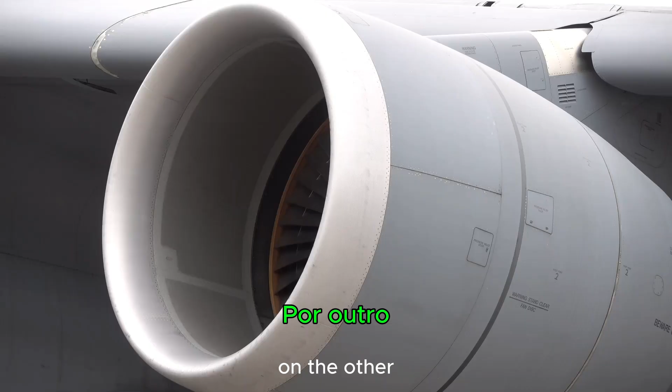On one side, we have the sharp economic ideas of Daniel Fraga, a thinker known for his strong opinions on careful spending, fighting inflation, and the power of decentralization. On the other, we have the incredible fire-breathing heart of modern aviation, the jet engine. You might be thinking, what could a financial guru and a jet engine possibly have in common? It's a great question, and the answer is more fascinating than you might think.

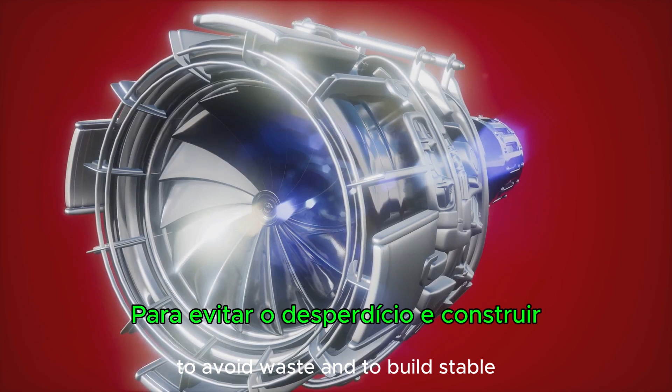At first glance, economics seems to be all about money, markets, and human behavior. Jet engine engineering, meanwhile, is about physics, materials science, and controlling incredibly powerful forces. One is about spreadsheets and policy, the other is about thrust and thermodynamics. But if we dig a little deeper, we find they are both fundamentally about the same thing: efficiency. They are both quests to get the most output from the least input, to avoid waste, and to build stable, resilient systems that don't catastrophically fail.

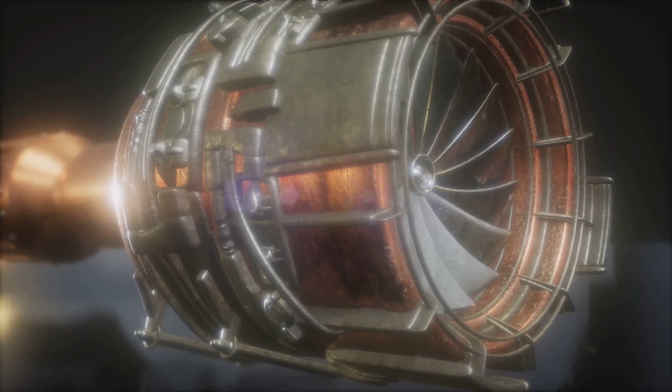It turns out that the principles Fraga championed for a healthy economy are almost a perfect blueprint for building a better, safer, and more efficient jet engine. Throughout this exploration, we'll use some simple economic terms that Fraga often discussed, like spending, waste, balance, and stability, and see how they map directly onto core engineering concepts. We'll see how an engineer's battle against aerodynamic drag is just like a government's fight against wasteful spending. We'll discover how the dangerous runaway heat inside an engine mirrors the destructive power of economic inflation.

By drawing these fun and clear parallels, we can gain a new appreciation for both the complexities of our economies and the genius of the machines that carry us across the sky. It's a journey into how sound principles, whether for money or for machines, lead to success. So, buckle up. We're about to take off on a unique intellectual flight where finance explains physics.

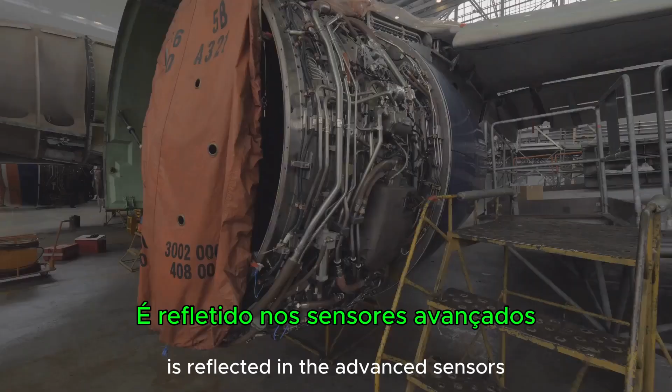We'll see how Fraga's advocacy for transparency is reflected in the advanced sensors that monitor an engine's health in real time. We'll even connect his ideas on decentralized systems like Bitcoin to a revolutionary new concept in aircraft design called distributed propulsion. By the end, you'll not only understand the basics of jet engine efficiency a little better, but you'll also see that the logic of building a strong, sustainable system is a universal language spoken by economists and engineers alike. Let's get this show on the road, or rather, in the air.

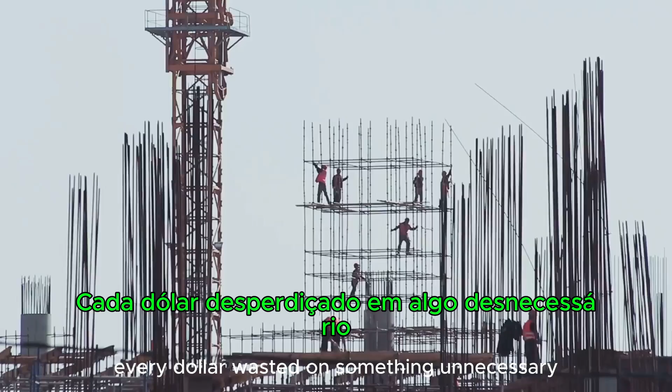In the world of economics, Daniel Fraga was a passionate advocate for fiscal prudence. This is a fancy way of saying he believed governments and individuals should be extremely careful with their money, avoiding wasteful spending at all costs. Every dollar wasted on something unnecessary is a dollar that can't be used for something productive, like building infrastructure or investing in education. This waste acts as a constant, silent drain on an economy's potential.

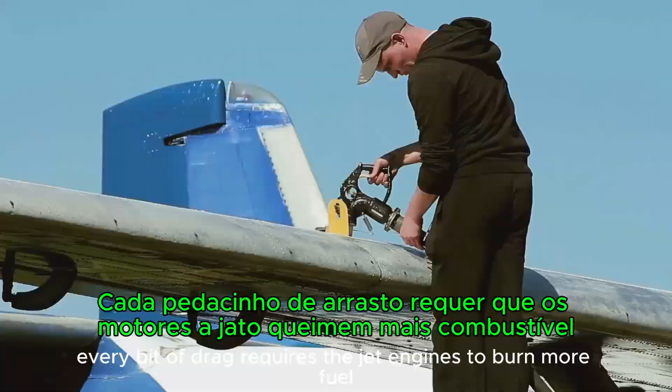In the world of aerospace engineering, there is a perfect parallel to this concept: aerodynamic drag. Drag is the force of air resistance that pushes back against an airplane, and it is the engineer's number one enemy. It is, in essence, pure, unadulterated waste. Every bit of drag requires the jet engines to burn more fuel just to maintain the same speed, which is the aeronautical equivalent of wasteful government spending. Engineers work tirelessly to minimize it.

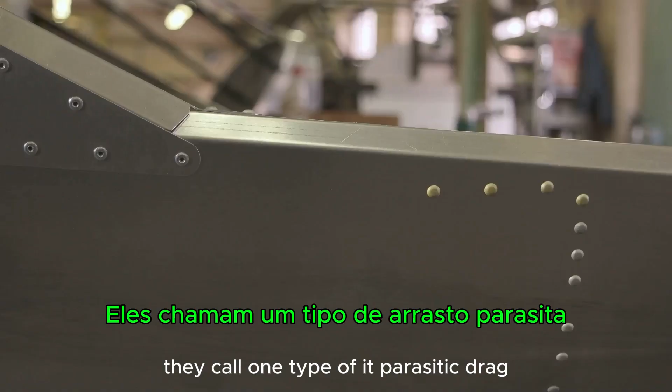They call one type of it parasitic drag, which comes from things like antennas, rivets, or any surface that isn't perfectly smooth. Think of these as the unnecessary expenditures in a national budget, costs that add up to a massive drain on resources. Just as Fraga would argue for trimming these fiscal parasites, engineers spend countless hours in wind tunnels smoothing out every surface of an aircraft to achieve a clean, efficient shape. The goal is to make the plane as slippery as possible, allowing it to glide through the air with minimal effort.

Achieving this smooth, undisturbed airflow known as laminar flow is the holy grail of aerodynamics. When air flows smoothly over a wing, it creates lift efficiently with very little drag. This is the aeronautical version of a perfectly balanced budget, where every resource, in this case the air itself, is used to its maximum potential without creating wasteful turbulence. It's like an economy where money flows smoothly, investments are smart, and there's no inflation eating away at people's savings. Fraga might have called this economic deflation in a positive sense, getting more value for your money. For an engineer, achieving laminar flow means getting more flight for your fuel.

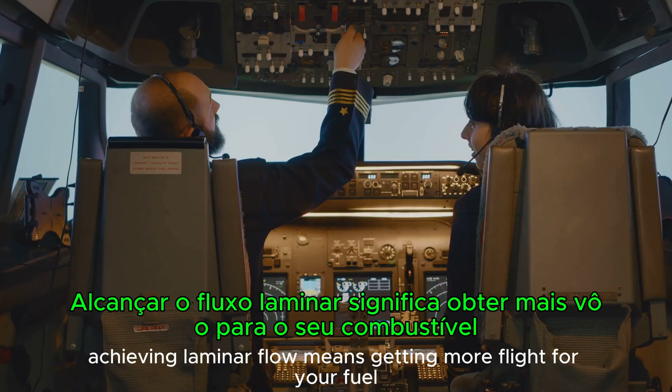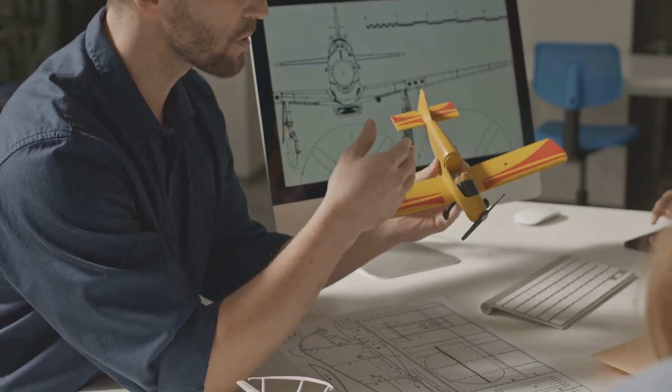Ultimately, the connection is crystal clear. Fraga's lesson on saving resources is a direct echo of the engineer's relentless battle against drag. Whether you're managing a nation's finances or designing a multi-million-dollar aircraft, the core principle is identical. Waste is the enemy of progress.

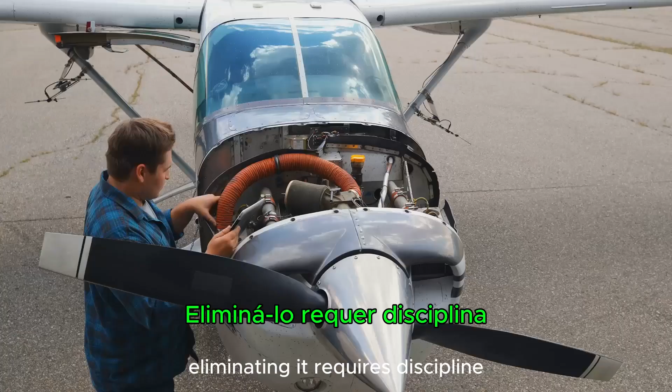Eliminating it requires discipline, attention to detail, and a deep understanding that small inefficiencies, when multiplied, can lead to massive losses. By designing aircraft that slice through the air with minimal resistance, engineers are putting Fraga's economic philosophy into practice, ensuring that the precious energy stored in every drop of jet fuel is spent on moving forward, not on fighting unnecessary battles against the wind.

If drag is like wasteful spending, then the heat inside a jet engine is like economic inflation. Daniel Fraga famously warned about the dangers of uncontrolled inflation, where a central bank prints too much money. At first, it might seem like a good thing. More money flowing around can create a temporary economic boom. But soon the value of each dollar plummets, prices spiral out of control, and the entire system becomes unstable and inefficient, potentially leading to a total collapse.

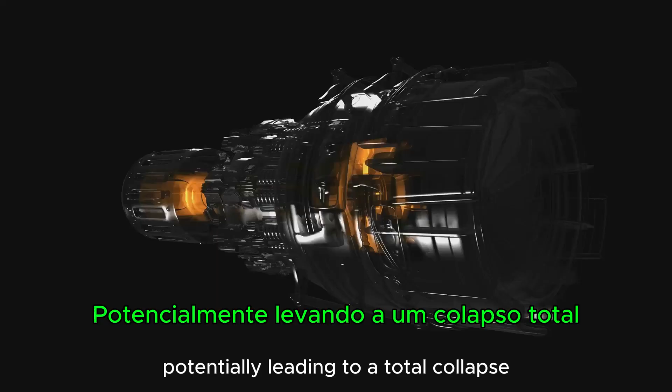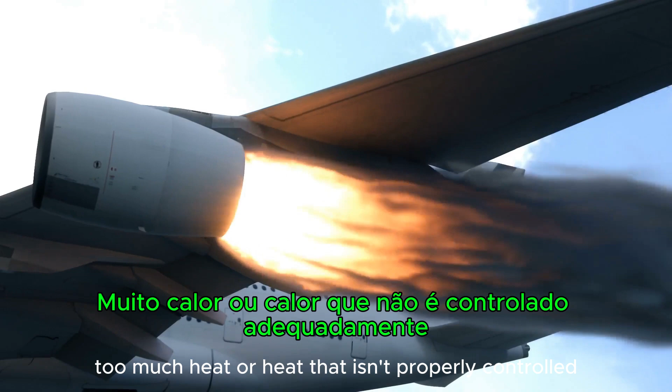In a jet engine, the single most important factor for power is heat. The hotter the gas exiting the engine, the more thrust it produces. But just like inflation, too much heat or heat that isn't properly controlled can lead to catastrophic failure. Engineers are constantly trying to increase the thermal efficiency of an engine, which is a measure of how well it converts the heat from burning fuel into useful work.

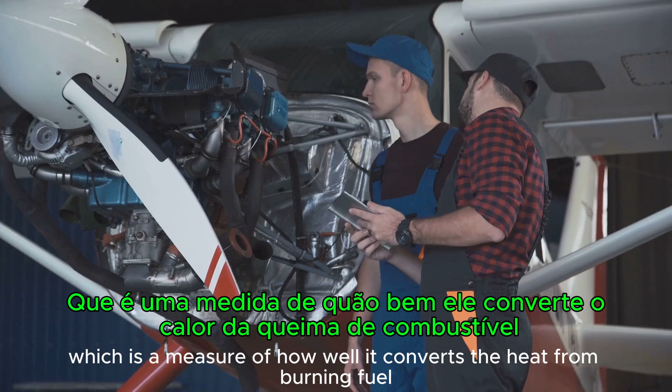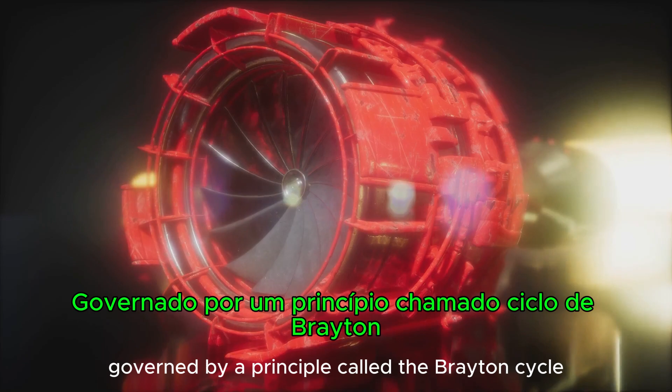One way to do this is by increasing the pressure ratio inside the engine, governed by a principle called the Brayton cycle. By squeezing the air more tightly before adding fuel, the engine can burn that fuel at a much higher temperature and pressure, extracting more energy. This is similar to a central bank carefully managing economic growth. A little bit of controlled growth is good.

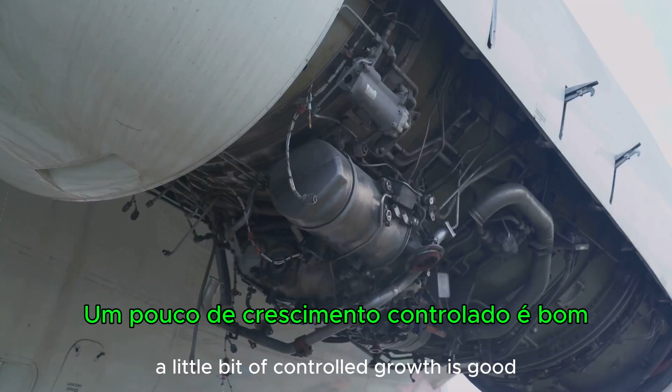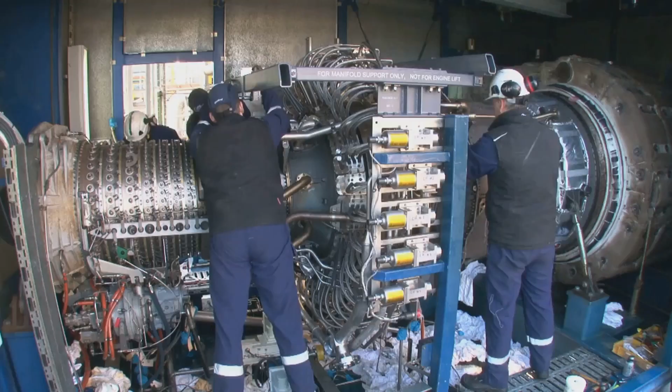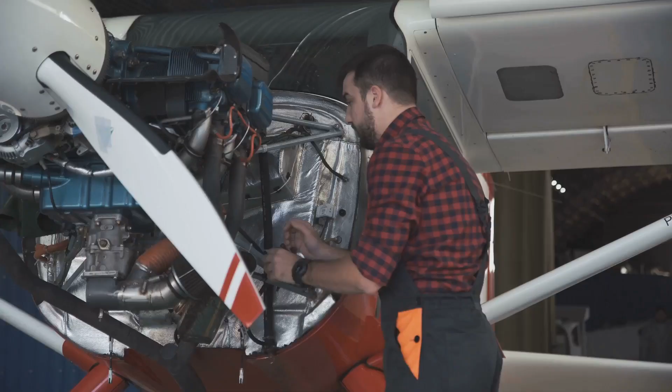However, if engineers push the pressure and temperature too high without reinforcing the engine's components, they risk disaster. The metal parts could melt or fracture under the stress, just as hyperinflation can fracture an economy. This delicate balancing act is the core challenge of modern jet engine design. Engineers want the benefits of high temperatures, more power, and efficiency, without the destructive consequences. They are in a constant battle against engineflation.

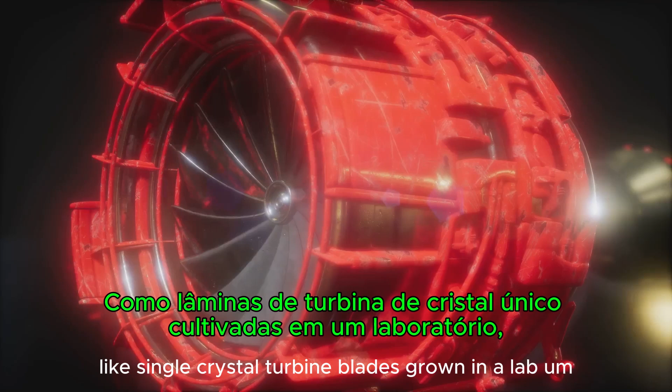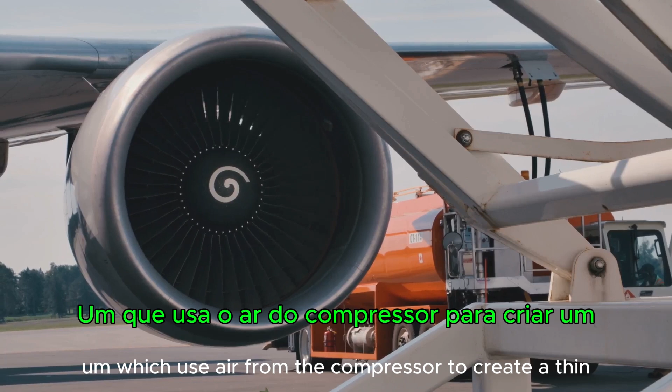To manage this, they use incredibly advanced materials like single crystal turbine blades grown in a lab that can withstand temperatures hotter than the melting point of the metal they're made from. They also design complex internal cooling systems which use air from the compressor to create a thin protective layer of cooler air over the hottest parts of the engine. This is like a government implementing smart policies to protect citizens from the worst effects of inflation.

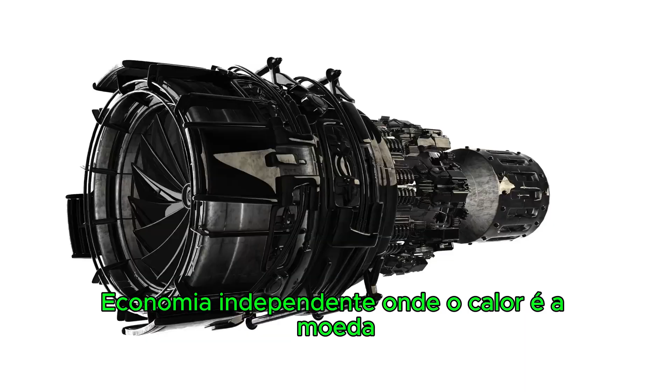So when you see a jet engine, think of it as a tiny, self-contained economy where heat is the currency. Fraga's warnings about the perils of printing too much money resonate perfectly with the engineer's challenge of managing thermal energy. Both systems require a masterful balance. Push too hard and you get a powerful but short-lived boom followed by a spectacular failure.

Manage it wisely with strong materials and cooling safeguards, the equivalent of sound fiscal policy, and you create a system that is not only powerful and efficient, but also stable and reliable for the long haul. Taming the heat is taming inflation, a principle that holds true both on Wall Street and at 30,000 feet.

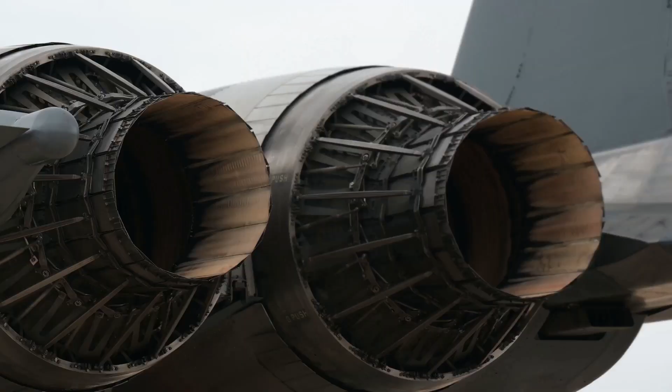Let's dive deeper into the heart of the engine, the combustion chamber. If the engine as a whole is an economy, then the combustion chamber is its central marketplace, a place of high stakes, high-speed transactions where the fundamental laws of supply and demand play out in milliseconds. In any economy, you have suppliers who provide goods and services and consumers who create demand for them. A healthy economy keeps these two forces in a delicate balance.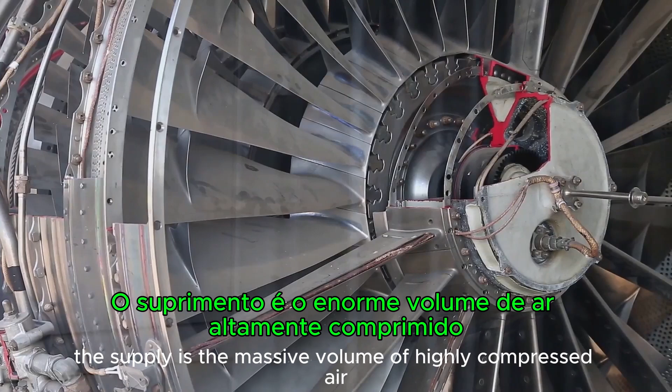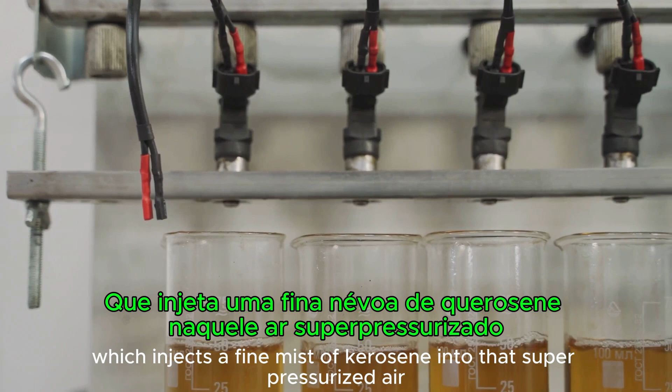In the combustion chamber, the supply is the massive volume of highly compressed air delivered by the engine's compressor section. The demand is created by the fuel system, which injects a fine mist of kerosene into that super-pressurized air. The goal is to achieve the perfect air-to-fuel ratio. If you inject too much fuel for the amount of air available, so excess demand, you get an inefficient, smoky fire. This is like an overheated economic boom fueled by cheap credit, where too much money chases too few goods, leading to waste and instability.

In an engine, this condition can cause the flame to become unstable or even extinguish itself entirely, a dangerous event known as a flameout. On the other hand, if you inject too little fuel for the air, insufficient demand, the fire will be weak and may not produce enough energy to keep the engine running. Kinda similar to an economic recession where a lack of spending brings commerce to a halt.

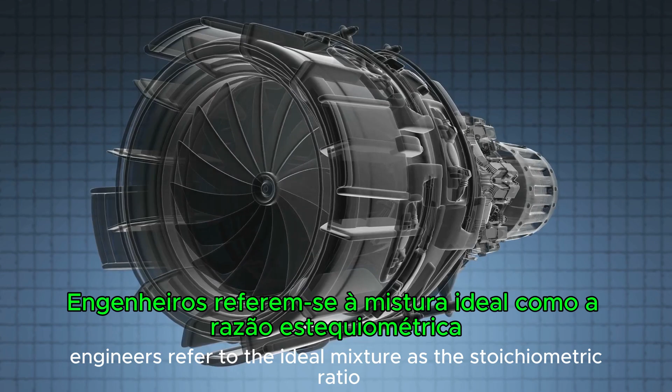Engineers refer to the ideal mixture as the stoichiometric ratio, but we can think of it in Fraga's terms as the gold standard of internal combustion. It's that perfect stable point where every molecule of fuel is matched with the right number of oxygen molecules to achieve a complete, clean, and powerful burn.

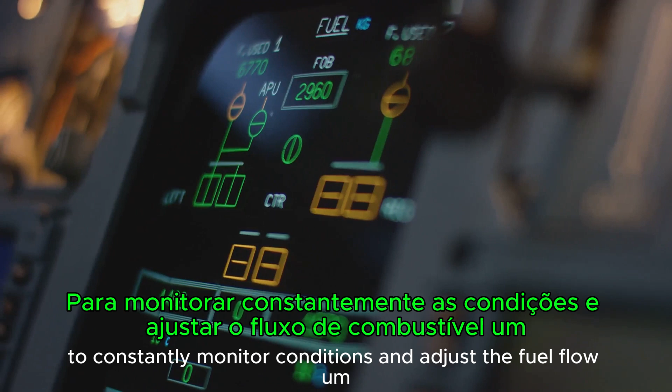Modern engines use sophisticated computer systems called FADECs, Full Authority Digital Engine Control, to constantly monitor conditions and adjust the fuel flow with incredible precision. These systems act like a hyper-aware central bank, making thousands of micro adjustments per second to maintain that perfect balance, ensuring the engine performs efficiently, whether it's idling on the tarmac or at full throttle climbing through a storm.

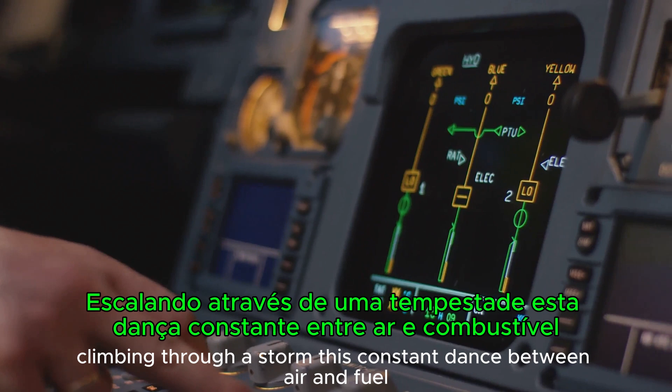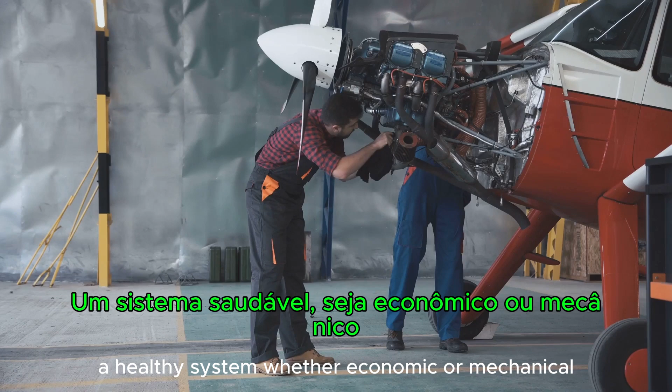This constant dance between air and fuel highlights a core economic principle that Fraga would appreciate. Balance is not static, it is dynamic. A healthy system, whether economic or mechanical, must be able to adapt to changing conditions while maintaining its core equilibrium.

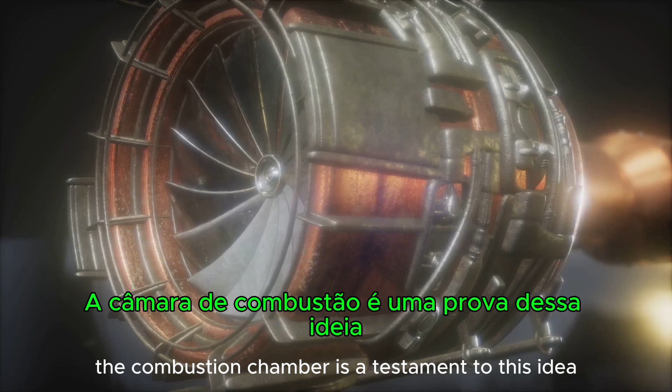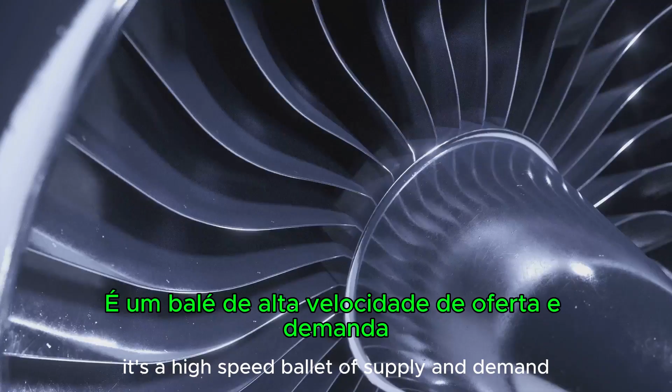The combustion chamber is a testament to this idea. It's not just a simple fire pit. It's a meticulously engineered environment designed to manage a continuous controlled explosion. It's a high-speed ballet of supply and demand, where achieving the perfect balance isn't just a goal for efficiency. It's absolutely critical for survival.

One of Daniel Fraga's most forward-thinking ideas was his strong advocacy for decentralization. He was an early proponent of cryptocurrencies like Bitcoin, seeing them as a way to create a more resilient and transparent financial system that wasn't dependent on a single point of failure, like a central bank or government.

In a decentralized system, power and control are spread out across a network. If one part of the network fails, the rest can continue to operate. This creates a system that is inherently more robust, adaptable, and resistant to shocks. It's a powerful idea, and amazingly, it's now taking flight in the world of aviation through a concept called distributed propulsion.

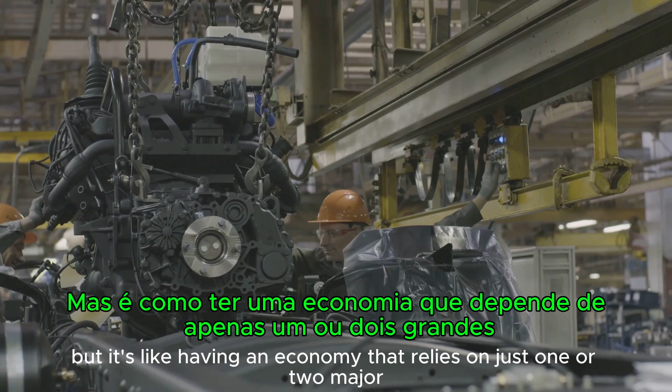Now, traditionally, aircraft have relied on a small number of very large, centralized jet engines, usually 2 or 4, slung under the wings. This is a simple and effective design, but it's like having an economy that relies on just 1 or 2 major industries. If one of those massive engines fails, it creates a significant problem that requires the entire aircraft system to compensate.

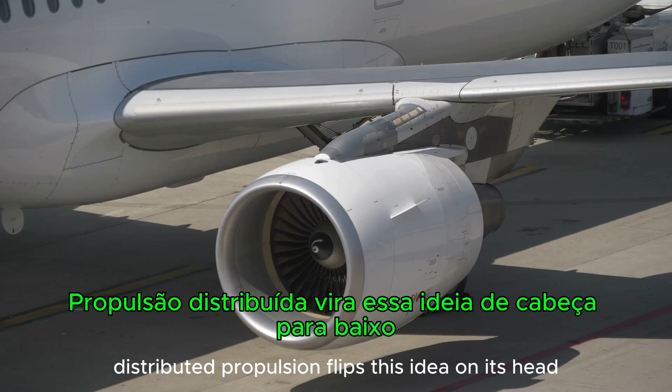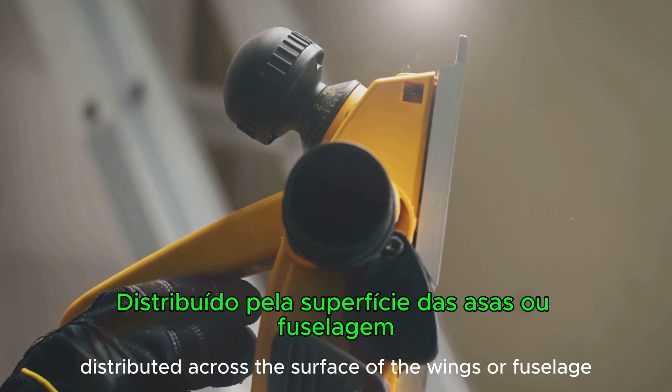Distributed propulsion flips this idea on its head. Instead of a few large engines, the aircraft uses many smaller, lighter, and often electric motors distributed across the surface of the wings or fuselage. This is the aeronautical equivalent of Fraga's decentralized economy.

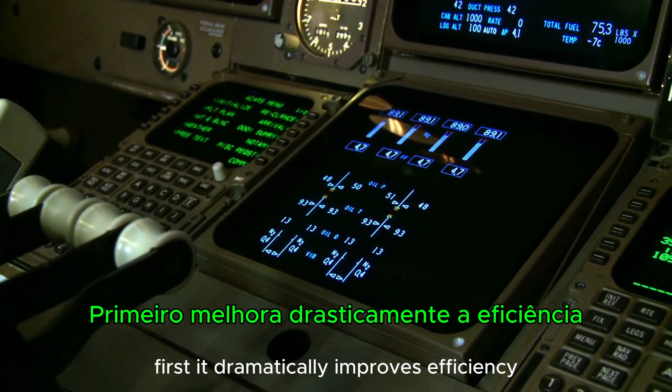The benefits of this decentralized approach are enormous. First, it dramatically improves efficiency. By blowing air uniformly over the wing's surfaces, these smaller motors can increase lift and reduce drag, allowing the aircraft to fly using significantly less energy.

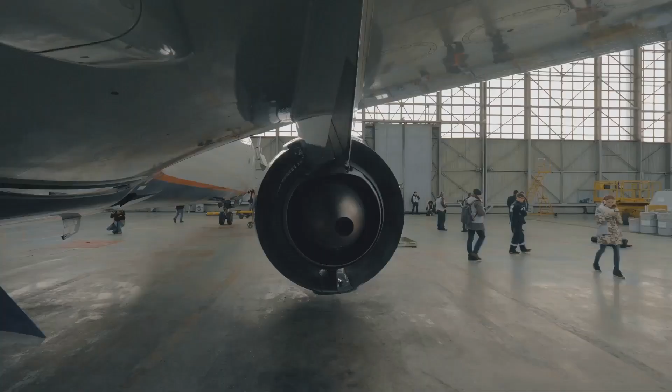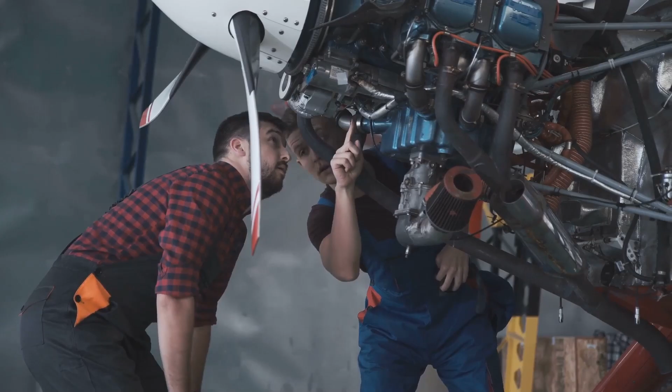Second, it enhances safety and resilience. If one or even several of the small motors fail, the impact on the aircraft's overall performance is minimal. The remaining motors in the network can easily pick up the slack, making the system far more fault tolerant than a conventional design. This is precisely the argument Fraga made for decentralized finance.

A network of many small participants is stronger and more stable than a system dominated by a few large, too big to fail institutions. This parallel shows how a fundamental principle that decentralization builds resilience can be applied to solve problems in vastly different domains.

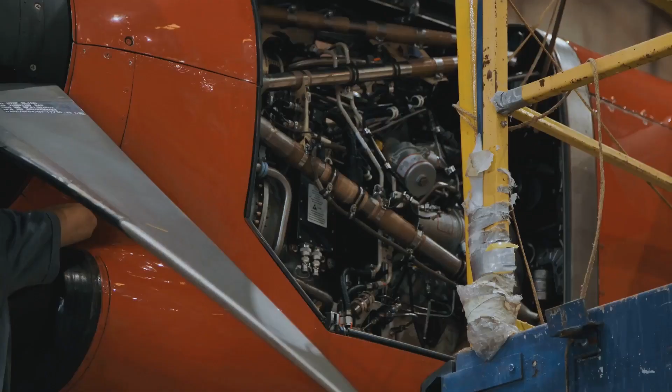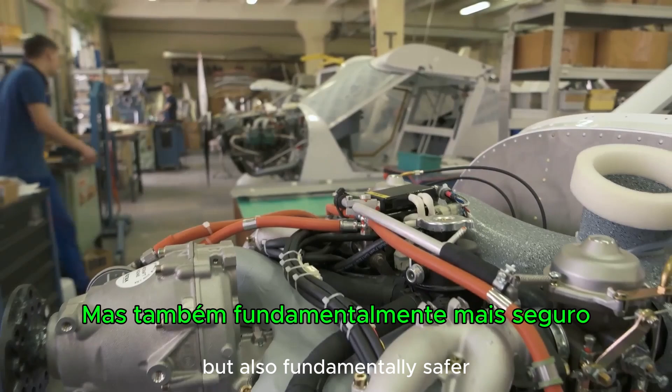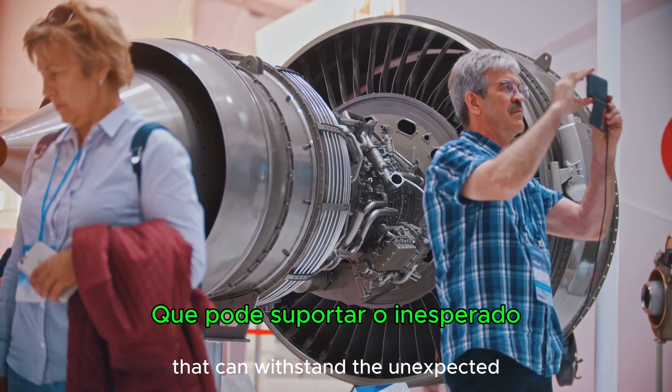Fraga saw it as the future of money, a way to protect individuals from the whims of centralized control. Aerospace engineers now see it as the future of flight, a way to build aircraft that are not only more fuel efficient and environmentally friendly, but also fundamentally safer. Whether you're designing a currency or an airplane, spreading out the workload and eliminating single points of failure is a powerful strategy for building a system that can withstand the unexpected and thrive in a complex world.

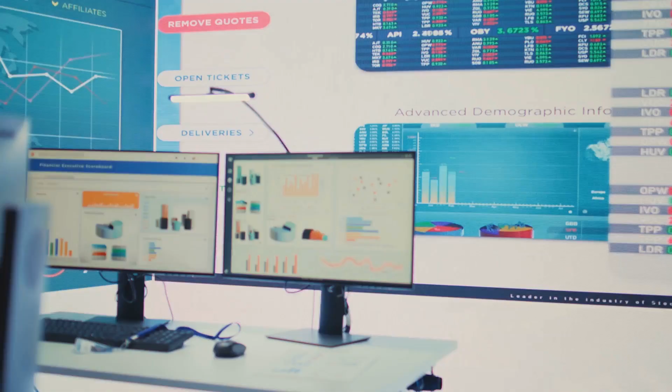Daniel Fraga often argued that transparency is the bedrock of a trustworthy system. He believed that for an economy to be fair and efficient, all the information about spending and resource allocation should be open and accessible. Without clear, real-time data, it's impossible to make good decisions, spot problems before they become crises, or hold leaders accountable. In the high-stakes world of jet engines, this call for transparency is not a political philosophy.

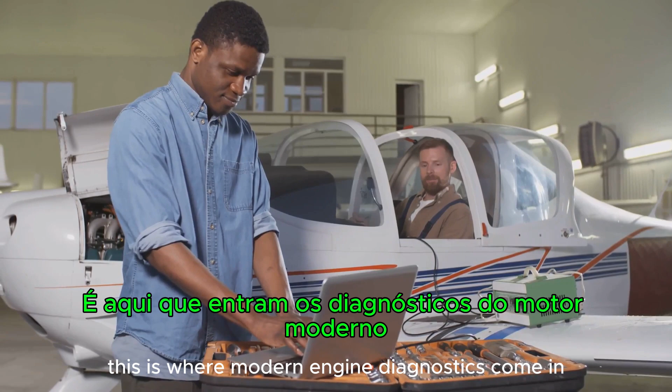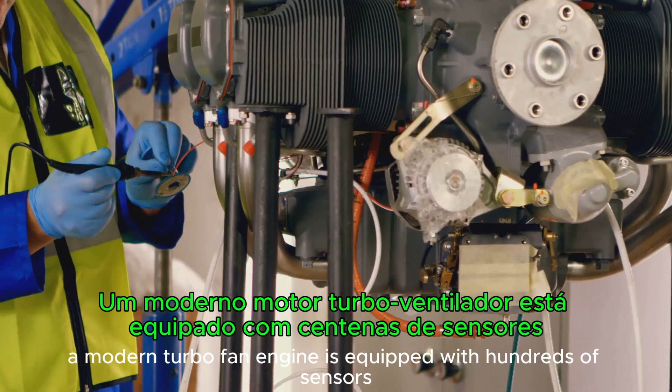It's an absolute necessity for safety and performance. This is where modern engine diagnostics come in. An engine doesn't just run, it constantly reports on its own health with total transparency. A modern turbofan engine is equipped with hundreds of sensors that monitor everything from temperature and pressure to vibration and rotational speed. This data is streamed in real time to the cockpit and to maintenance crews on the ground. This constant flow of information provides a perfectly transparent view into the engine's inner workings.

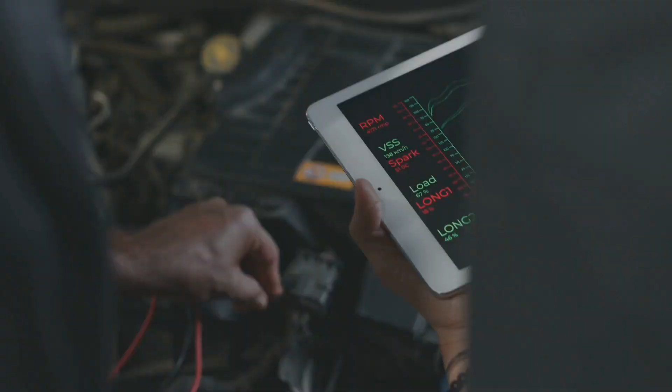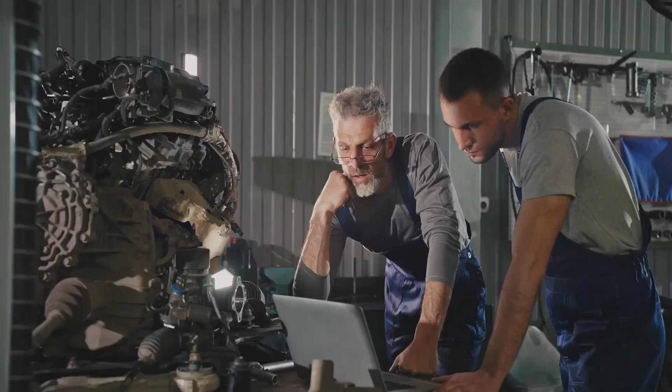It allows pilots and engineers to spot tiny anomalies, a slight increase in temperature here, a minor vibration there, long before they can develop into serious problems. This is the engineering equivalent of a transparent government budget. With all the data out in the open, you can ensure the system is operating as designed and allocate resources, like maintenance, exactly where they are needed most.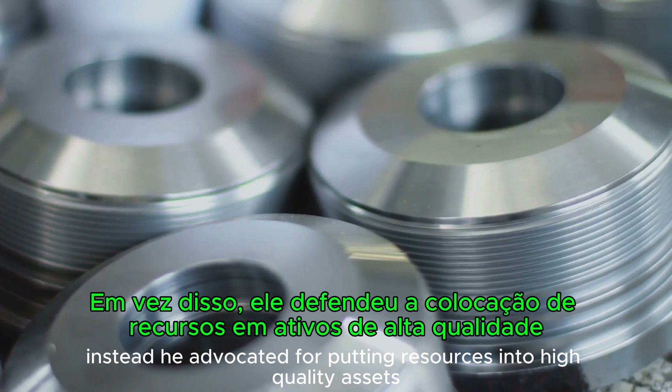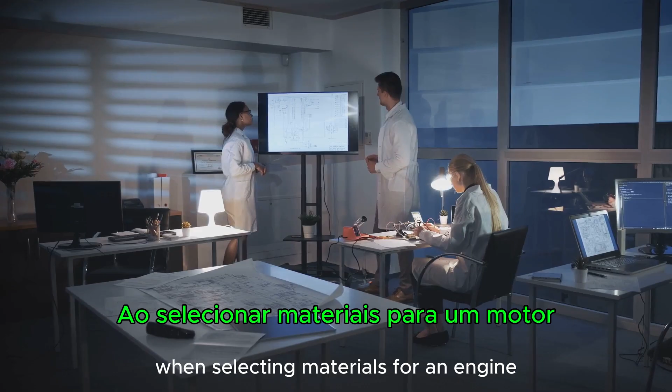Beyond transparency, Fraga also emphasized the importance of wise investment. He argued against malinvestment, spending money on things that don't provide a good long-term return. Instead, he advocated for putting resources into high-quality assets that create lasting value. Engineers face this exact choice when selecting materials for an engine. They could use cheaper, heavier metals, but that would be a classic malinvestment. The initial savings would be quickly erased by higher fuel consumption and lower performance.

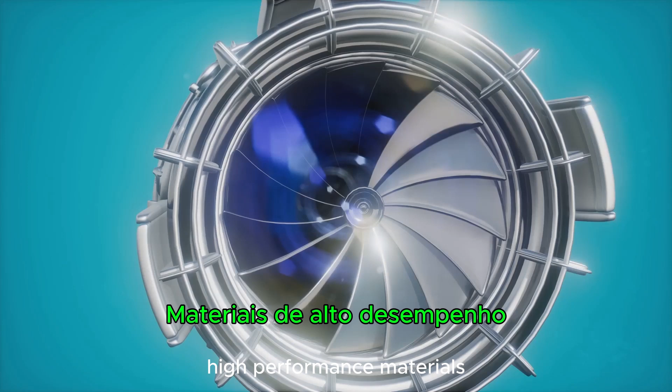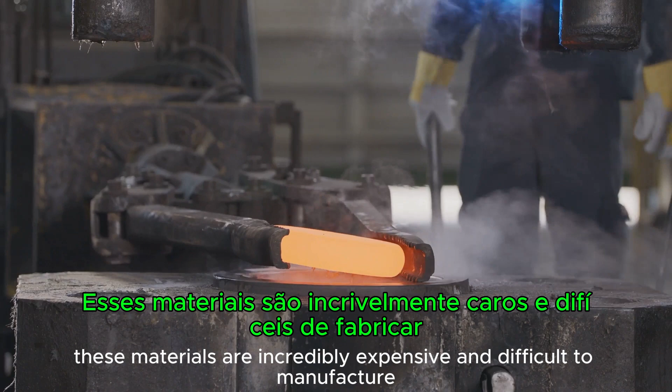Instead, they make a wise investment in exotic high-performance materials like titanium composites and nickel-based superalloys. These materials are incredibly expensive and difficult to manufacture, but they offer an enormous return on investment. The turbine blades at the heart of the engine, for example, are often made from a single crystal of a superalloy. They are lightweight, incredibly strong, and can operate in temperatures that would melt steel. The weight saved and the heat resistance gained directly translate into massive improvements in fuel efficiency and engine lifespan.

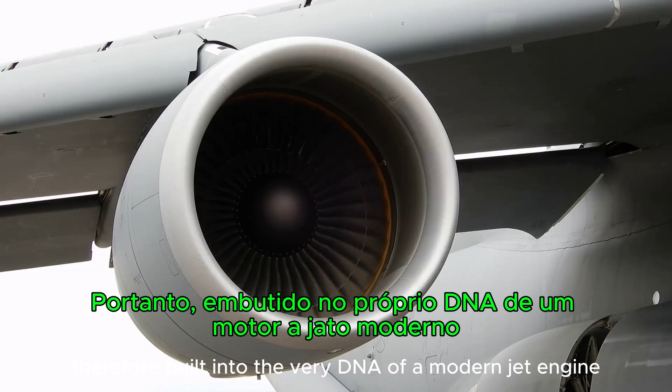Using cheap materials would be like a government printing unbacked money. It might seem like a solution in the short term, but it inevitably leads to a crash. Fraga's principles of transparency and wise investment are therefore built into the very DNA of a modern jet engine.

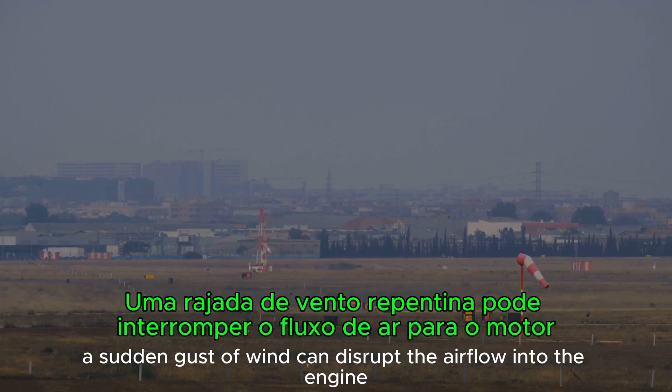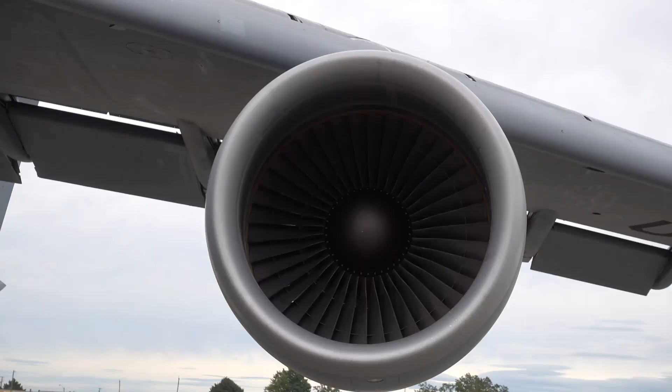In aviation, these shocks can come in many forms. A sudden gust of wind can disrupt the airflow into the engine. While flying through a flock of birds, a bird strike can cause severe damage. An abrupt change in throttle can create a pressure surge inside the compressor. Any of these events can lead to a dangerous instability known as a compressor stall or surge. This is when the blades inside the compressor stop biting the air correctly, causing the flow of air to break down or even reverse. It's the engine's equivalent of a stock market crash or a fiscal stall, where confidence collapses and the entire system violently shudders to a halt.

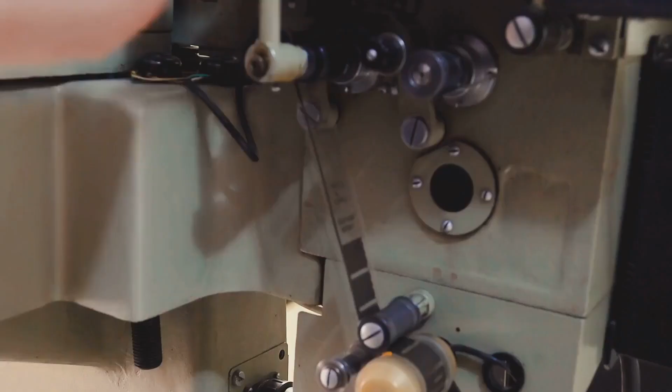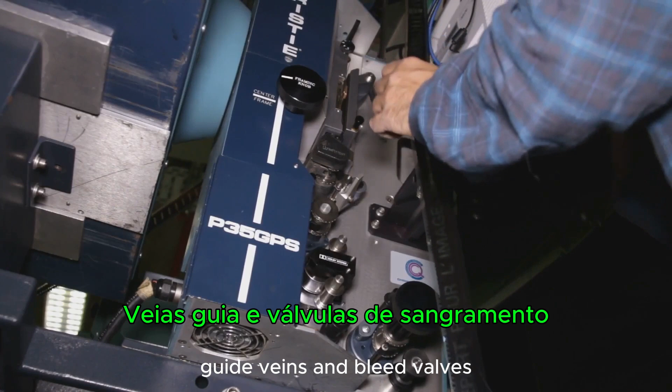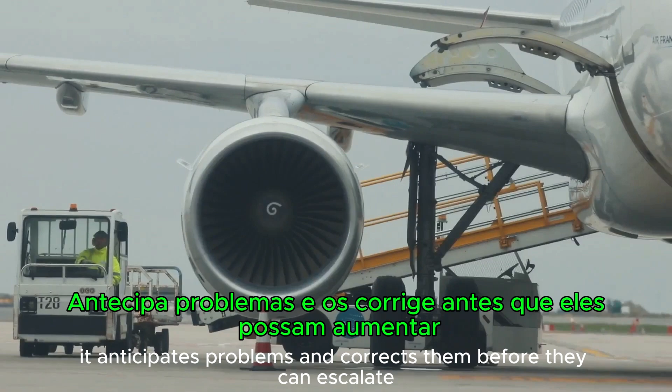To prevent this, engine control systems are designed to be the ultimate stabilizers. The FADEC, which we mentioned earlier, acts like a vigilant central bank, constantly monitoring the engine's operating conditions. If it detects the slightest hint of instability, it instantly makes microscopic adjustments to fuel flow, guide vanes, and bleed valves to keep the engine within its stable operating margin. It anticipates problems and corrects them before they can escalate. This is precisely the kind of proactive, stabilizing policy that economists advocate for to prevent financial panics. The goal is to maintain confidence in the system, ensuring it can absorb shocks without failing.

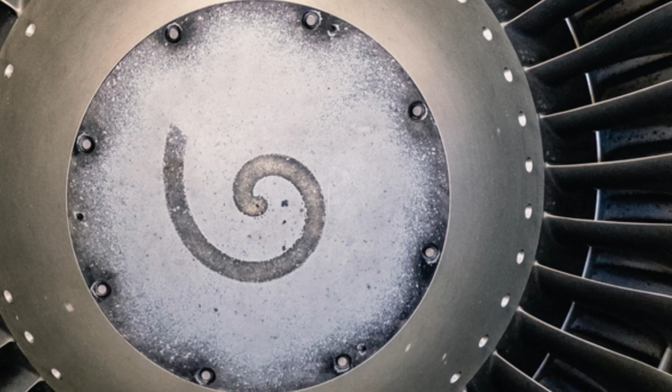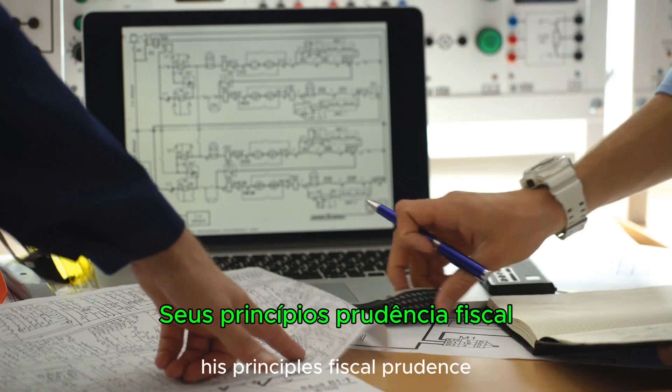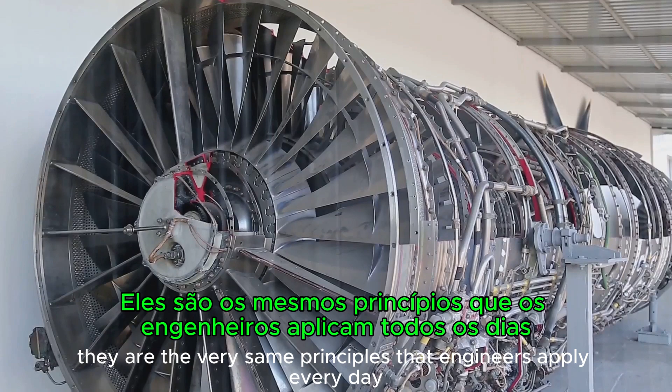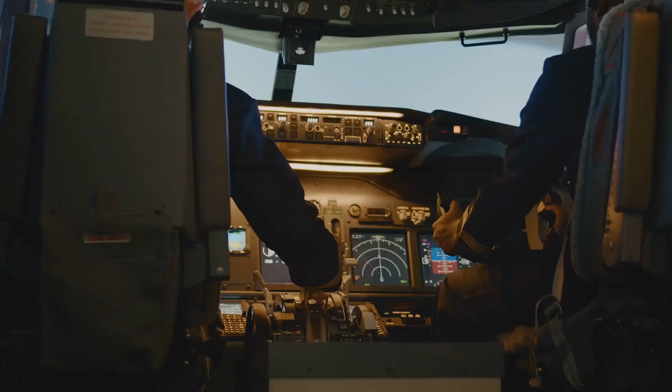In conclusion, the wisdom of Daniel Fraga provides us with a surprisingly effective lens through which to understand the marvels of modern engineering. His principles, fiscal prudence, inflation control, balanced supply and demand, the resilience of decentralization, the necessity of transparency, and the pursuit of stability are not just abstract economic theories. They are the very same principles that engineers apply every day to design, build, and operate the jet engines that power our globalized world. Thinking like Fraga doesn't just help us build a better economy, it helps us build better, safer, and more efficient machines. It reminds us that whether we are managing money or manipulating fire and air, the quest for a smart, stable, and waste-free system is a universal one.